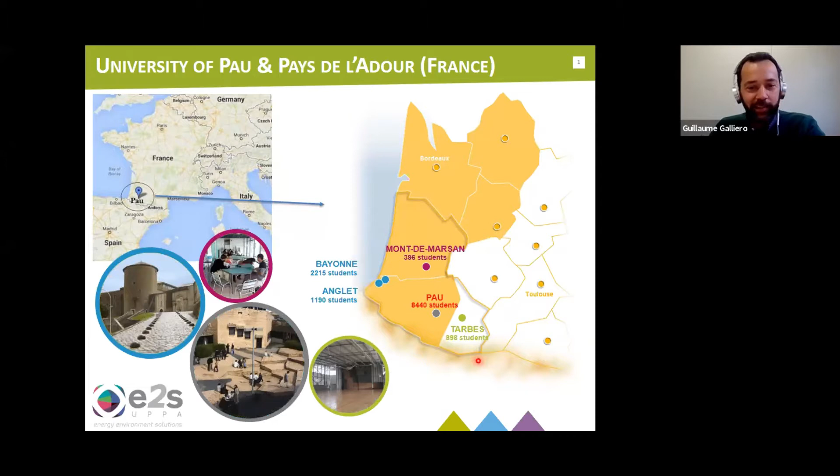A few words about Pau, because it's quite a small town. It's located in the very southwest of France, and it's a university with something like 15,000 students, and it's nice because it's close to the sea and close to the mountain. So if you like all that, it's a really nice place. And I'm heading a lab where we are trying to do all these things, from the physical chemistry to the geology.

So the philosophy, the strategy of our lab, it's a kind of a bottom-up approach, but most often it's a bottom-up strategy where I try to understand what is going on at small scales. This is something I will focus on during this presentation, to go up in scales, and at the end, to better understand what is going on underground and how to store energy, how to produce georesources. So in this lab, you have about 120 members. Some are chemical physicists. I would say that I am a chemical engineer. We do have as well geomechanicists, geophysicists, and geologists.

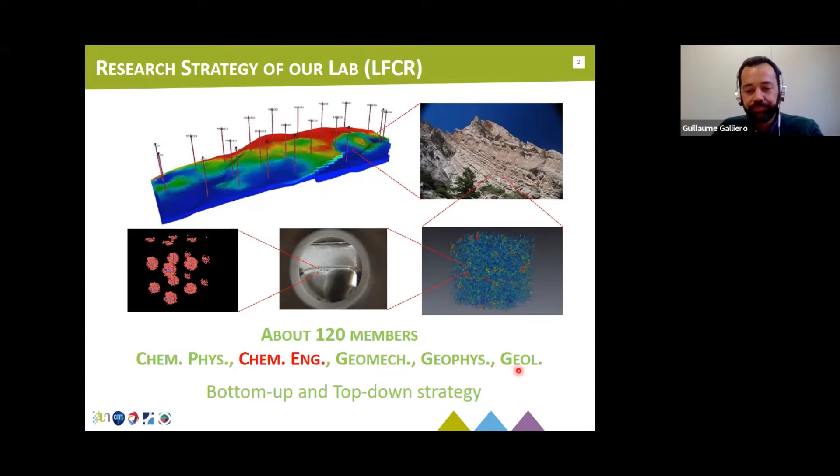So first, the motivation of this work is mostly to improve the management of georesources and as well the underground storage, because it's clearly a crucial point for having a good energy mix. And so I will deal with topics related to better understanding the fluid origin and migration underground, how they move, how they migrate, how they fractionate underground in a porous structure. I will deal as well with the initial state. So you have a reservoir, you have fluid in it, and how we could use molecular simulation to better understand how the fluids organize themselves in such a structure. And I will discuss as well topics related to gas storage, and especially how to monitor that.

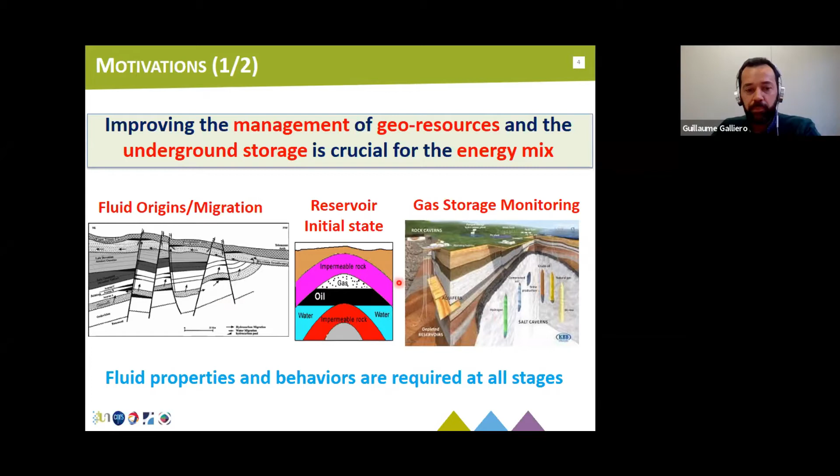So if you are thinking of all these problems, okay, there is a rock structure, there is a porous medium, but there are fluids in it. And so it's crucial to understand exactly how fluids behave in such underground conditions. So when you are looking at these properties, they are present at all stages of georesources management: when you are dealing with geophysics, to locate, geochemistry, to trace, when you are storing, when you are producing, even processing or transformation. So they are everywhere.

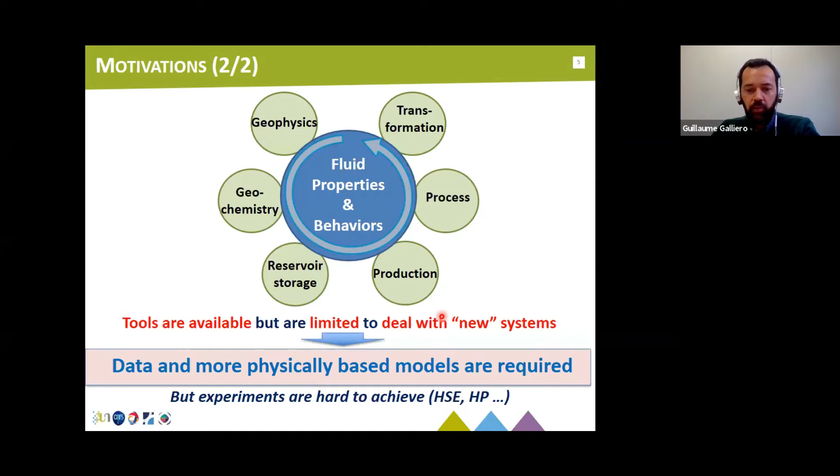And you have a lot of tools which are available. Most of you know them well, but they're often limited when you are tackling a new system, which means that overall, even if there are a lot of available data, I think that there's still a need for data and maybe more physically based models. They are still required. But the problem is that when you are dealing with georesources, conditions are harsh, and so the experiments are sometimes difficult to achieve because of high pressure, because of HSE trouble. So how are we trying to deal with that, or at least to tackle some parts of that? We are using molecular simulation. Most of you know that well. So here it's something adapted from Gubbins and Moore.

So where you see time and length scale, and depending on the time and length scale, you may choose different simulation tool, going from the ab initio simulation for very small system and very short time to continuum approaches to deal with the reservoir itself or even the basin.

And when you're looking at intermediate systems, so when you are interested in interfaces, porous structure, I would say that atomistic approaches is a nice tool, and you can have as well mesoscale. So I will deal mostly with these two kinds of tools, numerical tools to tackle that problem. And when you choose one tool, for sure, your choice is guided by what you are looking after. Even if you can couple the different scales, I will say some words about that.

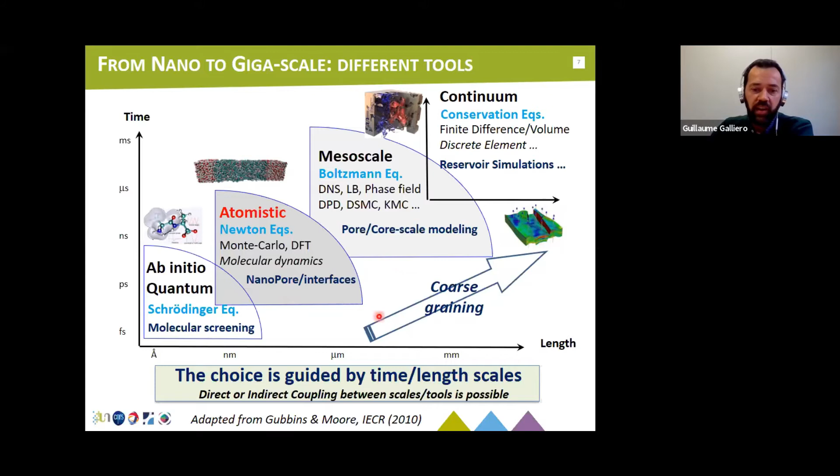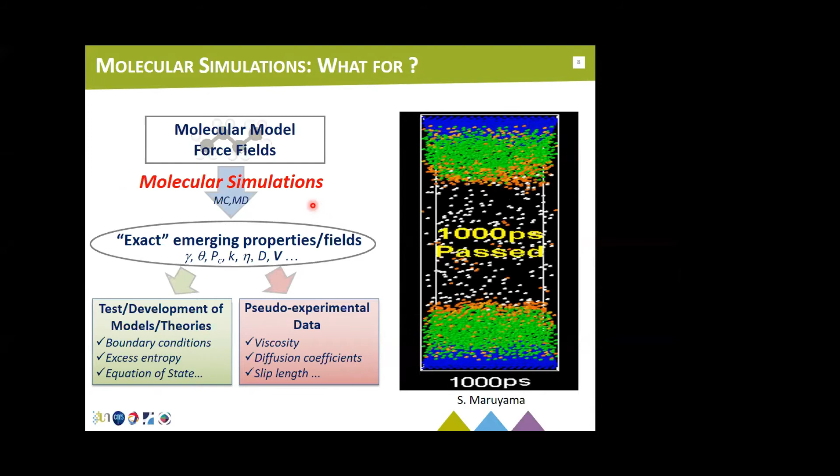So even if I think that most of you are really well aware of what molecular simulation is, it's, I think, a quite powerful tool because you start from a description of the matter simply by molecular models, typically force field. Then you are doing molecular dynamics or Monte Carlo, and you obtain exact emerging properties, exact for your choice in terms of force field.

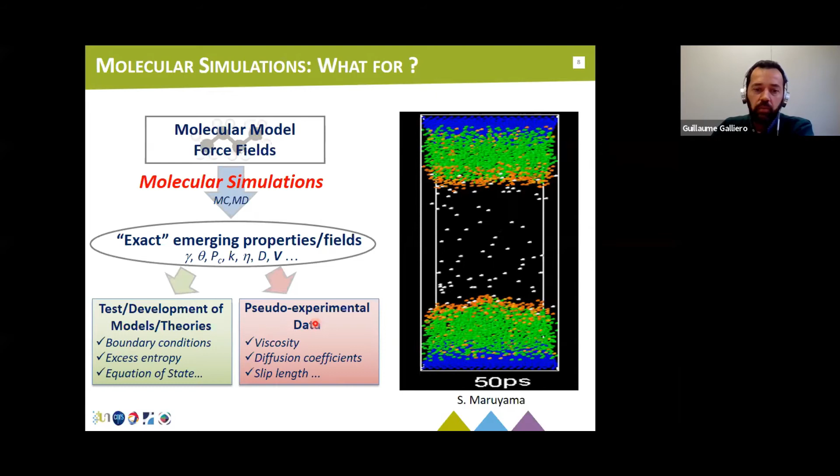And how could you use that? I think in two perspectives, both to develop, to improve model theories, or in some situations, even to provide pseudo-experimental data. And this is something that I will try to show you during this presentation.

So our strategy is the following. So we are trying to develop, or sometimes to use, simulation codes to study, or even sometimes to model, as finely as possible, fluid properties in terms of behavior and transport. So we are trying to better model properties themselves. So it's, for instance, some scaling law in terms of interfacial tension, where you can show that all interfacial tension may fall on the master curve.

There is something related to the excess entropy scaling, where you try to define in the supercritical region a gas-like behavior and a liquid-like behavior. We are trying as well to use this tool to better understand the physical mechanism. So in terms of transport of matter, so when you have two fluids that are mixing with each other in a porous structure, how they move under forces and external forces.

Here it's another case that I will detail a little bit in terms of transportation of gases through complex amorphous structure, topics that you know well. And sometimes we are trying to upscale this information. And to do that, there are basically two strategies. The first one is to couple this molecular simulation tool directly with continuum approaches by an exchange zone. So you couple small scale, molecular scale with the continuum scale simulation.

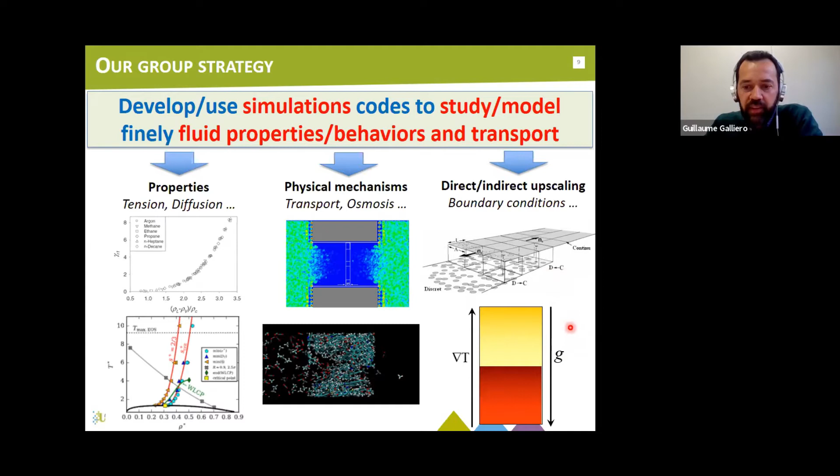And in some others, as I will show later, you can even upscale directly the result from the simulation at a smaller scale, at the molecular scale. So again, the idea is to provide an overview of some results. So it will be like some snapshots on some results that we did obtain during the last year.

So I will start from what I have called the nanofluidics. So it's simply fluid mechanics at a nanoscale. And why is it an interesting topic? It's because in such situations, the surface effect becomes dominant over the volumic one. So you have that when you are dealing with geoscience, georesources in cap rocks, in shale, or even at surface when you are dealing with membranes. So in most situations, when you are dealing with such systems, the usual continuum approach should be revisited.

To provide you some insight about that, here I have shown a small droplet confined between two solid walls, and the colors correspond to the variable density in space. So as you can see, there is a strong structure in the liquid phase, and such structure has an impact on the behavior of the fluid itself.

But the problem is it's relatively difficult to perform experiments at that scale, even if you look, for instance, at results that were provided by a surface force apparatus, where this structure could be inferred from the solvation force versus the distance between two plates that could be measured. And so an option to better understand this situation is to employ this in silico experiment using molecular simulation.

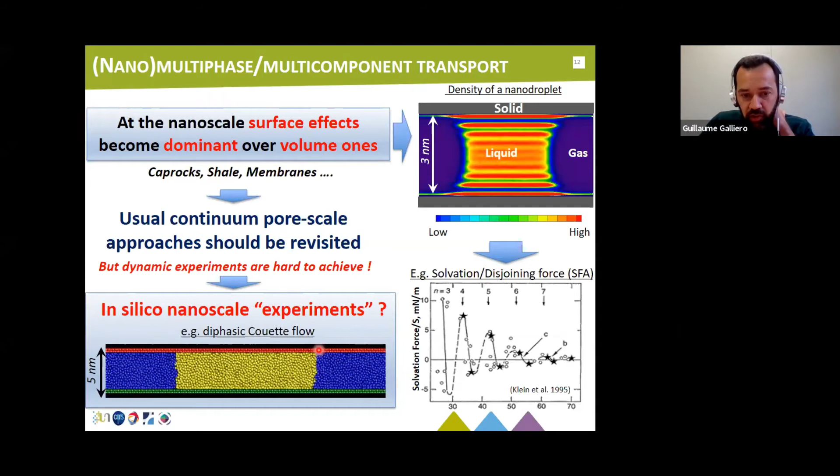So here it's an example of a diphasic Couette flow. So here you have two liquids that you shear, and you look at the evolution of the interface between the two, and especially at this point, which is called the triple line or the contact line dynamics.

So I will first start with some issues in simple systems. So my case study is the following one. I will look at the problem of multi-phase dynamics at the nanoscale. I will deal with a simple nano droplet in a perfectly flat slit pore, which is fully rigid as well. So because of this fluid structure, strong structure,

one can expect some physical phenomena to occur. For instance, because of these inhomogeneities in terms of density, we could expect some effect as well on the viscosity, a kind of local viscosity that varies with space. Because there is a frontier between a liquid and a gas, or two liquids, you may expect as well viscous stresses between the two phases.

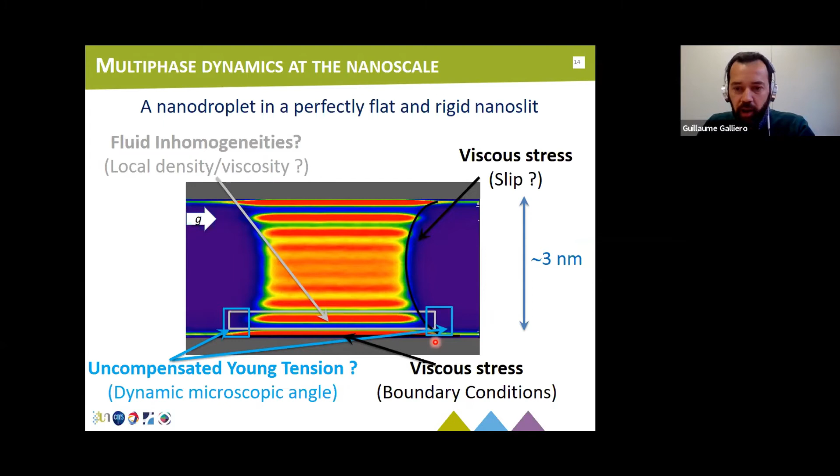And when you are looking at the contact between the two fluid phases and the solid phase, one might expect some behavior related to the Young tension, especially in the dynamic regime. So often called the dynamic microscopic. I will not tackle all those problems, but I will just focus on two of them.

The first one is how fluid inhomogeneities may have an impact on the dynamic properties itself. So this is something done with some colleagues from the LFCR, my lab, and François Montel from Total, so with Hairong. So the question is simply, is viscosity variable in space because of fluid heterogeneities, because of the confinement, or because of the proximity of a surface?

If you see it in an integrated way, the dynamic surface force apparatus has already shown that the effective viscosity in highly confined situations usually increases. And so the idea was simply to look at a simple fluid, Lennard-Jones-like, confined between two solid walls, and shearing such a structure to look at the response in terms of shear rate and shear stress. A brief picture of the fluid density profile.

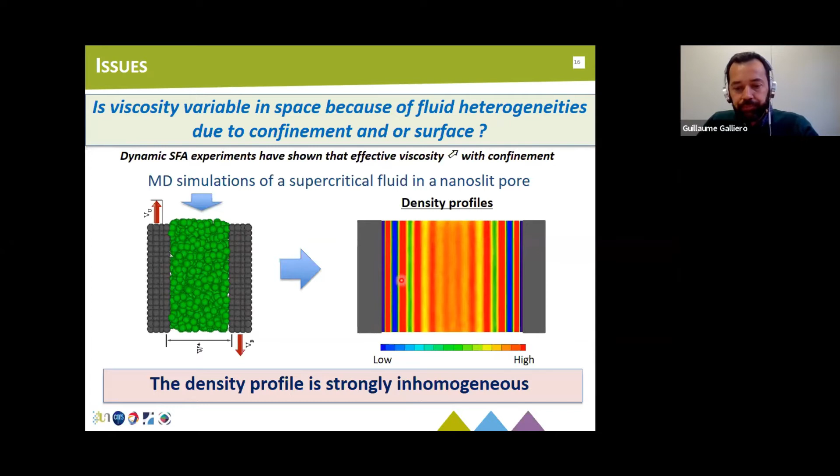So again, strongly inhomogeneous. And now if we look at what is the viscosity in space, so here is a solid wall, here is the pore center because the system is symmetric. So I just show half of the system. The symbols correspond to the local viscosity computed from the molecular simulation. And what you see immediately is that whether you are at low pressure or at high pressure, viscosity is variable in space. And indeed it follows more or less density variation.

But if you just deduce the local viscosity taking into account the variation in terms of density, what is called a van der Waals model, you obtain the full line, which is qualitatively consistent with the molecular simulation result, but not quantitatively. And it's worse when you are dealing with high pressure situations, which means that there are non-local effects. And to tackle that, it's relatively simple. You can employ what we call density functional theory.

So we just assume that locally, the information here does not depend only on the density at this point, but as well on the variation of density around that point. And so if you employ such a model, what you see immediately is that you can capture very well the variation of viscosity in space.

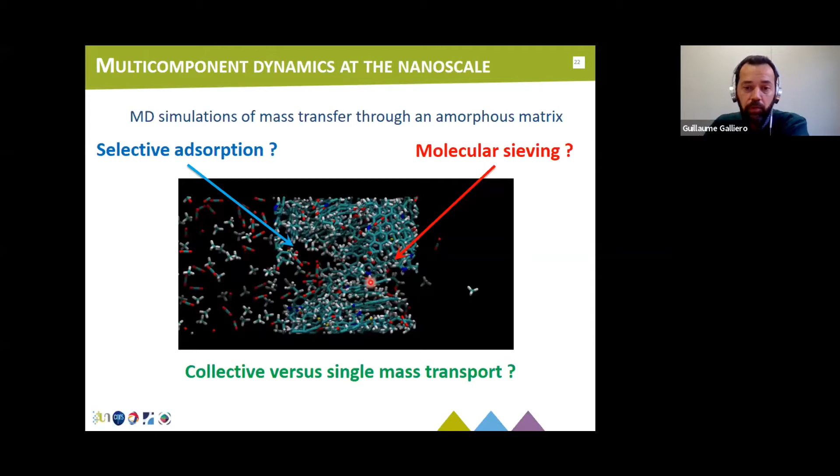And indeed, we have done some work on that, especially in kerogen, with some colleagues, Patrick Bonnaud, Amaël Obliger, and Romain Vermorel from the lab, and Julien Collell from Total. And you have probably seen things which are similar during the talk of Professor Chin. And what we have done is the following.

So again, it's simply simulating a gas mixture composed of methane or CO2, and pure fluids as well, at reservoir conditions, and looking at the response of the flow relative to the external force. So if you look at how the fluid transports itself from this part to this part, you can define a flux, and you can relate that to a pressure gradient, something which is often done in the oil and gas industry, where they employ what they call the Darcy model, where there is a linear link between the flux and the pressure gradient.

If you do that, what you see immediately is that there is not a linear relationship between the two. And the second point, which is more annoying, is that if you change your fluid, if you go from methane to CO2, you change your relation. So it is as if the apparent permeability is dependent on pressure, temperature and the molar fraction, which would mean that it's not a Darcian flow. But indeed, it's simply because the force that is used to determine the relation between the flux and the force is not the correct one.

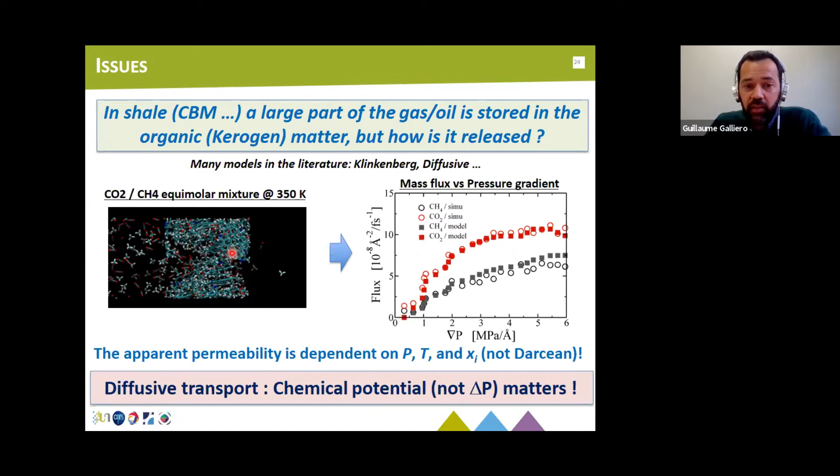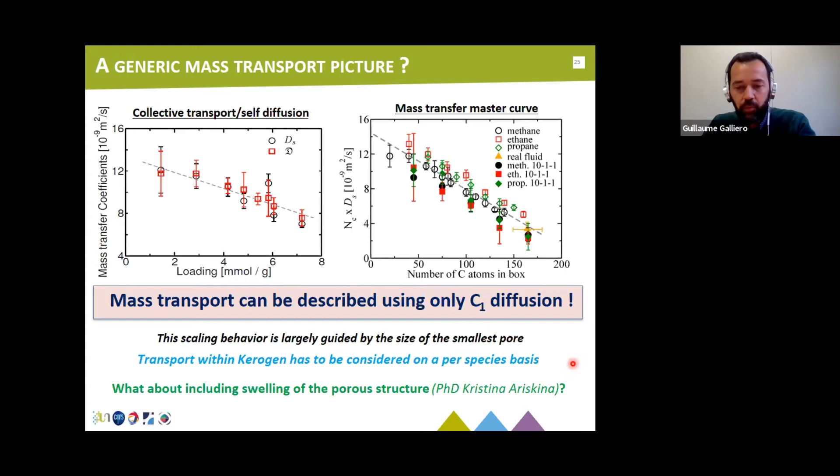Still, there are some open questions about that. And the first one, and the main one, is probably the fact that we have assumed in this simulation that the solid matrix is rigid, which is not the case. And so taking into account the swelling of the matrix leads to another story. And this is something that is done by Kristina Ariskina with Amaël Obliger now.

So now I will move on to the second part, which is related to the big scale, the reservoir scale. So the idea is just to show you that in some situations, this small scale simulation can be useful as well at the reservoir scale. I have taken, again, 3 different examples.

The first one is how we could coarse grain the fluid model to make it, for instance, compatible with SAFT-like equation of state. And this is something that has been done by some colleagues from the lab with Jean-Luc Daridon and a colleague from an Applied Mathematics lab. And this is, as you will see, a strategy which is very similar to the one that Eric Muller showed you some weeks ago. So the idea is simply, is it possible to define a coarse-grained molecular model which is adequate for the oil and gas industry in terms of fluid properties?

So you have 2 options. You can describe your fluid using a very detailed molecular model. It works. It's not that easy to handle in some cases, but it may work. It means a dozen parameters. Some are not parameters, but it's a large number of degrees of freedom, which leads to typically hours to days of computation.

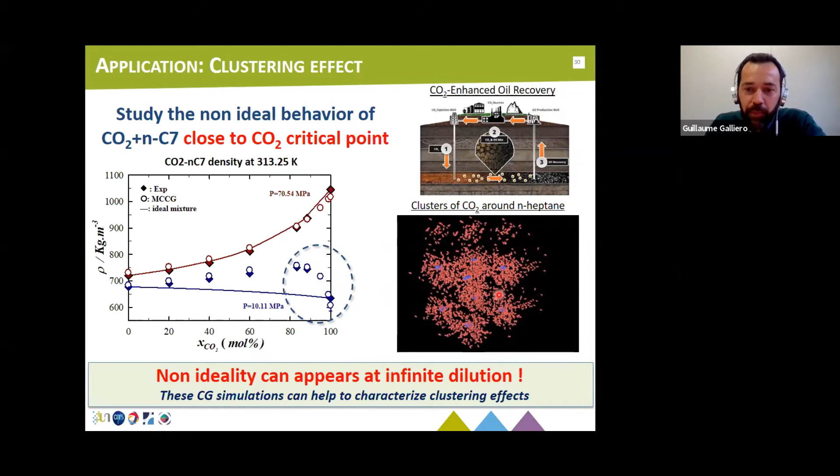So from a thermodynamic point of view, it's relatively funny because it means that you have a strong non-ideality nearly at infinite dilution. And this small scale simulation can help you to better understand what is going on.

Noble gases are often used as tracers. And if you look at their relative content, so the fractionation when they move underground, you may better understand how fluids have migrated, the origin of the fluid, how the fluid moves when you are storing CO2, etc. And the good point is that noble gases are chemically inert and they are ubiquitous, which means that you can find them everywhere. You have a lot of isotopes and they are fractionated, so partially separated, by physical phenomena only. Furthermore, for someone doing molecular simulation, they are the perfect guys. Spheres, simple to model, so really good to deal with.

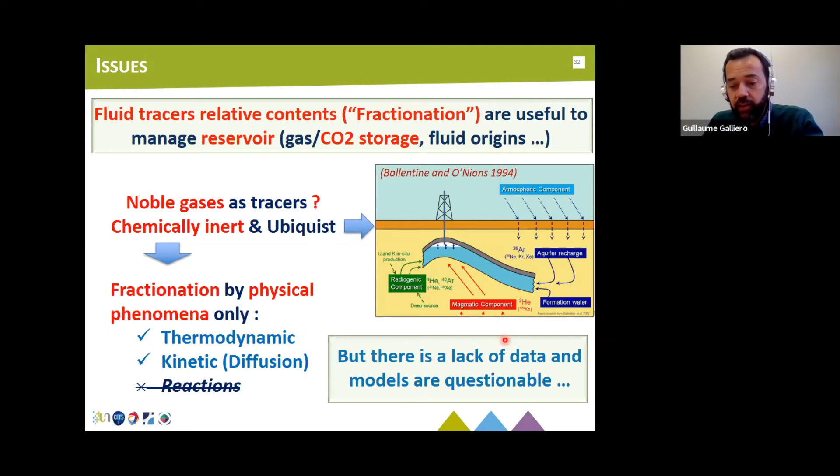And so the fractionation could be due to two phenomena, thermodynamic fractionation or kinetic fractionation related to mass diffusion, because they will move at different pace in terms of elemental fractionation or isotope fractionation. But the problem is that it's relatively difficult to measure their mass diffusion coefficient under georesource reservoir conditions, subsurface conditions, and so there is a lack of data. And you will see even the models are quite questionable.

So if you are working in this community of noble gas geochemistry, people are often using this model to describe the fractionation by mass diffusion. You have fractionation by mass diffusion because two species, two isotopes or two elements, will move with a different velocity because their mass diffusion coefficient depends on their mass and on their size, as we will see later. So in this community, people are often using Graham's law, which means that they assume that the mass diffusion is proportional to the inverse of the square root of the mass. But indeed, such a relation should hold only in the free molecular regime.

When you are dealing with georesource conditions, you are more in a situation where you are between the kinetic theory domain, so dense gas, and the liquid domain where the Stokes-Einstein law holds. So it's quite surprising that people are using such a rule and apply it to conditions which are not consistent a priori with the theory.

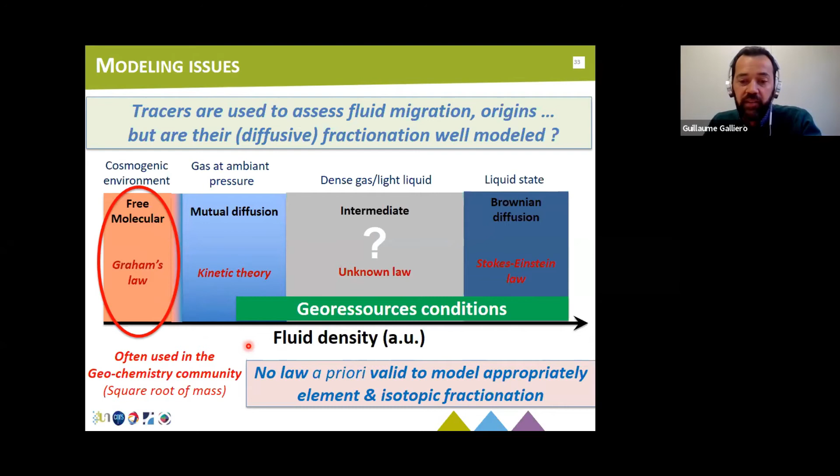But indeed, this could be relatively well explained by the fact that when you are dealing with noble gases, there is a strong link between the mass and the size. More precisely, the inverse of the square of the radius of the noble gases scales with the inverse of the square root of the mass. So indeed, such a rule holds well because what matters is the size, and the kinetic theory tells you that what will count is the section, so the square of the size, the radius at power 2. Still, it means that such a simple rule is valid only for the noble gases because they have this relationship, but it's not valid for different systems, different tracers.

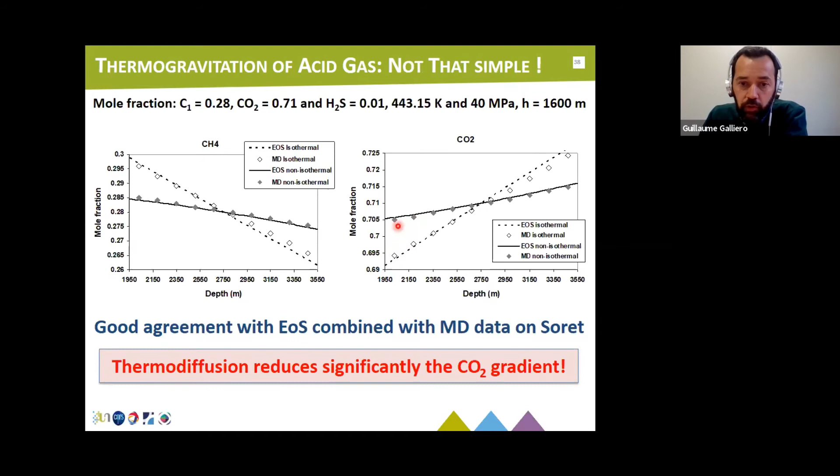So this is due to both the effect of thermal diffusion, which tends to push the CO2 towards the top of the fluid column, plus the thermal expansion. So which means that in that precise case, the situation is unstable because you have a density which is higher at the top than at the bottom of the fluid column. And that is why in such field, the composition of the reservoir was nearly homogeneous all over the height of the reservoir.

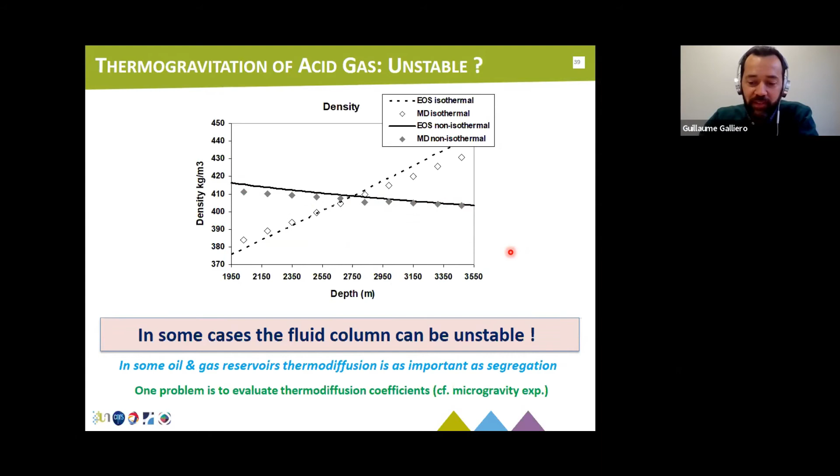So it's interesting to show that even with this small scale simulation, you can even better understand what is going on at a macroscopic scale in some specific situation. So if I make a brief summary of what I have tried to show you, I hope that I was able to convince you that with this molecular simulation tool, you can have access to information which is really inaccessible by experiment, and which can help as well to better understand how to improve your modeling, especially the continuum approaches. So it's really a good way, I think, to help further developing models.

And the good point is that such tool and force field is immediately applicable for a lot of systems, but not all. I have not discussed at all hydrogen bonding systems, or even polar ones, slightly polar ones. And it could be as well used to enhance and sometimes to check some physical or macro-physical concepts. But one should always keep in mind that these simulations are based on molecular models. The results are exact for a given force field, and all these molecular models possess intrinsic limitations. And the upscaling is not always easy, especially when you are dealing with a heterogeneous system.

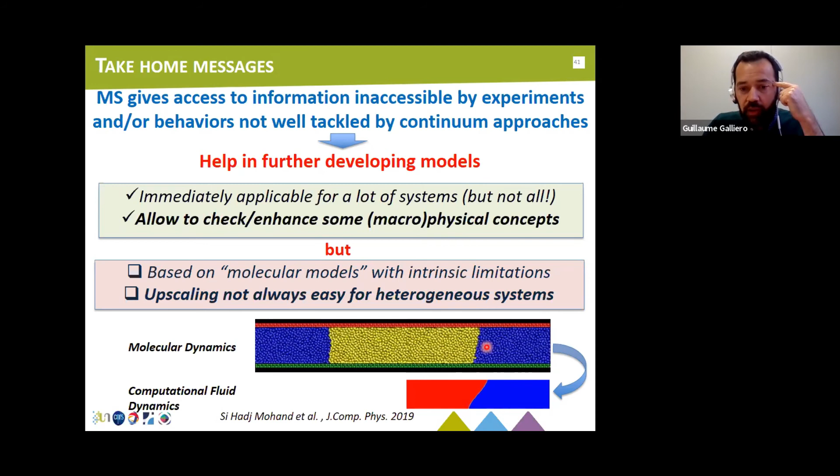So just a very last example, we have tried to simulate both with molecular dynamics and CFD simulation the moving contact line in a diphasic Couette flow. And here is the result at the two scales. And what you see immediately is that qualitatively you can get it right, but quantitatively it's always difficult to be very, very accurate.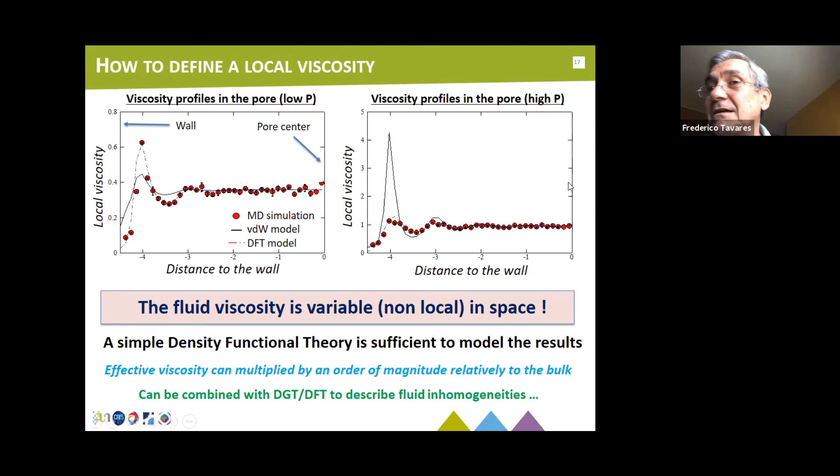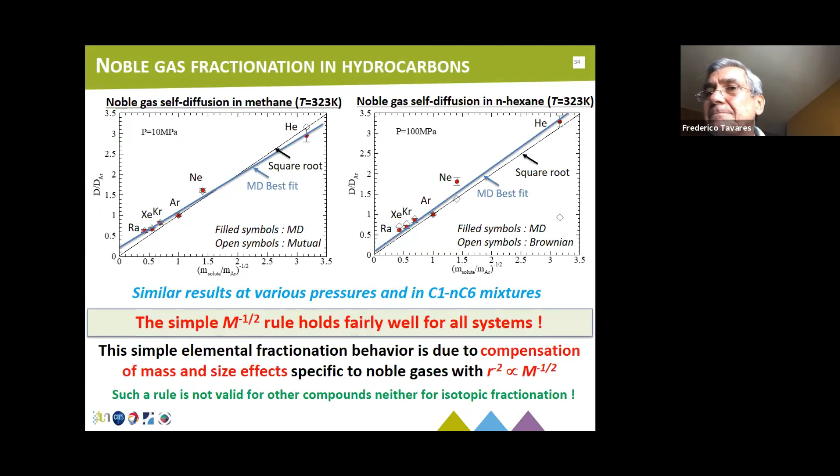I didn't understand much how you deal with the gravity field. It's not clear to me. And also, as I understood, you input the temperature gradient for your system. Yeah? It's a huge temperature gradient.

I'm wondering about the simulation, if you see some drift in energy when you impose this, because normally what you do is you impose some energy flux to get the temperature gradient instead of putting the gradient of temperature, because of the drift. I don't know if you saw that drift in energy, and also how you deal with phase transition at this size. Okay, so many questions in one.

So the first one, to apply gravity, you simply apply a body force, which is 10 to the power 10 times the one of real gravity. And so you can mimic extra gravity just to have the upscaling between 10 nanometers and 100 meters. And it works. You can look at the problem of sedimentation and density distribution in a gravity field. It works well.

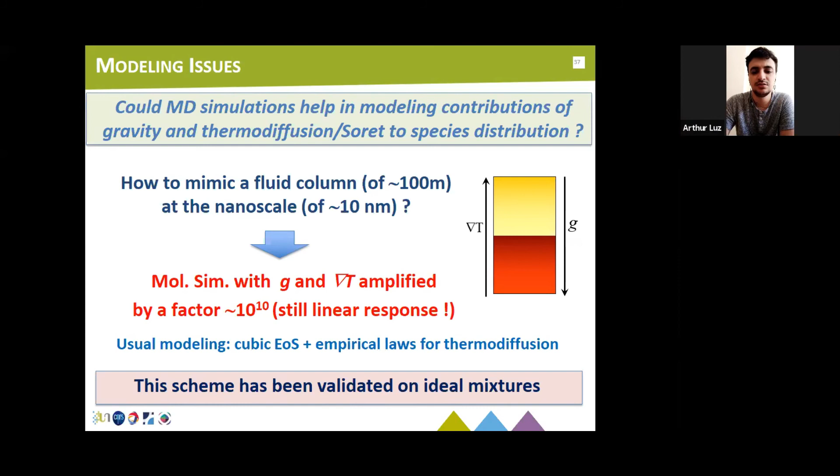More questions? Arthur has a question. Go ahead, Heza. Yes. Hello. Thank you, Professor, for your interesting presentation. Heza, can you open your camera? Professor, I'm using my mobile phone. Okay, no problem. Go ahead.

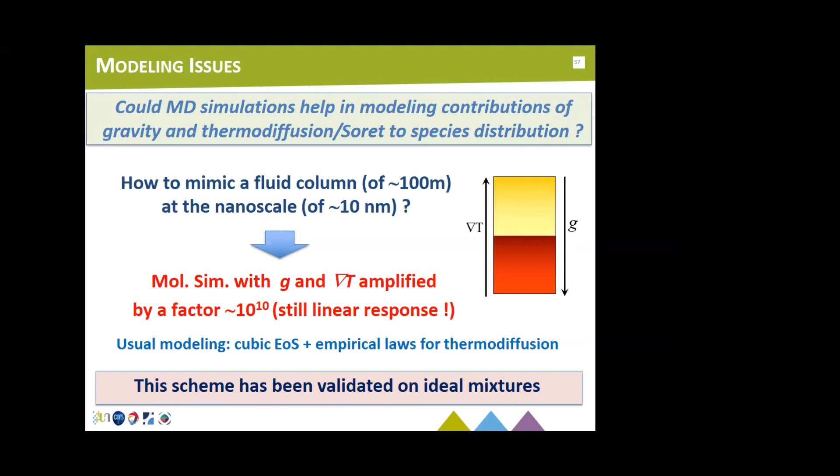Is it possible to explain the velocity jump at a fluid interface? Yes, I think that qualitatively it could be explained like that, but quantitatively it's not exact. Some colleagues from the group of Matar have tried to do it that way with a dynamic DFT as well recently.

So the point is simply the following one, I think, to understand that story. So here is the case where you have this liquid-liquid system, so diphasic. So you have an interface. So here is the velocity in the first phase, in the second phase, and you have this jump, or at least this discontinuity, or nearly discontinuity. And indeed, it's simply because when you put two liquids which are not miscible with each other, you have a density dip between the two.

So here it's the density of the two phases. You see? You have locally a decrease of density because they don't like each other. So you have a decrease locally. It's small, it's over something like 3 or 4 molecular sizes, but there is a decrease of density. And so if you have a decrease of density, it seems logical to have a decrease of the viscosity in that region. So again, you have a kind of local viscosity, which is depending on the local density.

It's not exactly the local density that counts, because there are non-local effects, like in the case we discussed with Fred, but still, I think qualitatively it's the explanation. So because the two fluids are not matching with each other, you have a kind of decrease of density locally. So the momentum will not propagate perfectly from one phase to another. So locally, you have a lower viscosity at the interface compared to the bulk viscosities. Was I clear? Yes. You know, at the interface, capillary pressure is 0.

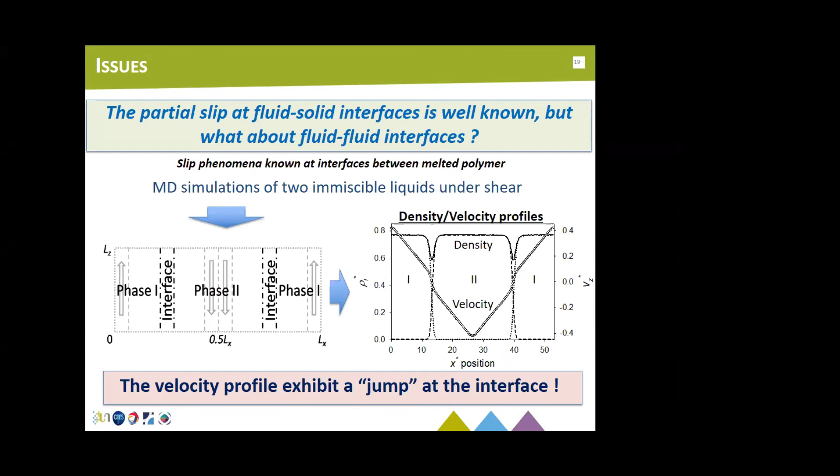So I have a question about this slide. First, just to get oriented, it's unusual for two different fluids to have exactly the same density and viscosity, isn't it? But that's what this picture is showing. Yeah, you are right. It's simply because phase 1 and phase 2 are exactly composed of the same fluid, and I have made them non-miscible just by reducing the cross energies between the two fluids. Okay, that's okay. It's simply to better see the effect, because the slopes are exactly the same, so you see it more easily. Yeah, all right, and then the result of making it more realistic is easy to expect, right?

Yeah, we have done it as well with the surfactant, and at this scale, you may have a slip between the two phases. The slip is not big, it's some nanometer, but it exists even in more realistic systems. Well, that's what I wanted to ask, the real question after getting oriented. So the surfactant is going to broaden the interface, right? And it should decrease the density difference, right? Yeah.

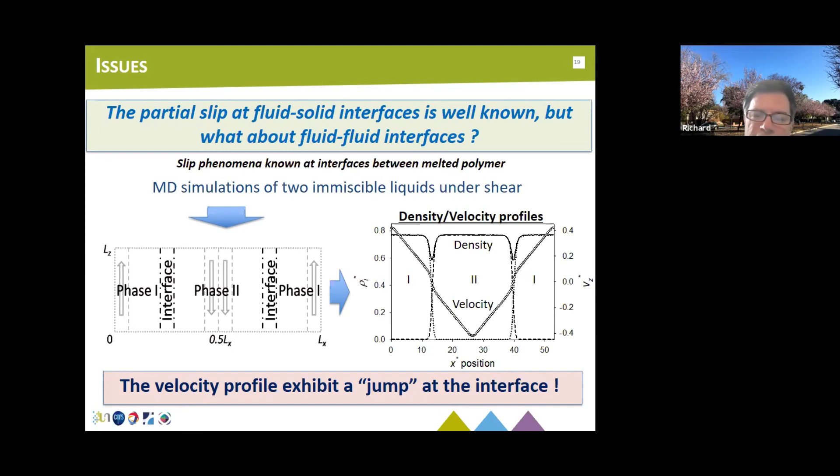Well, I guess if it's a third phase, if you think of it that way, and it's mostly surfactant, then it's going to be the viscosity of the surfactant. Yeah. Okay. Interesting. Okay, thank you.

Any more questions? Go ahead, Professor Haja.